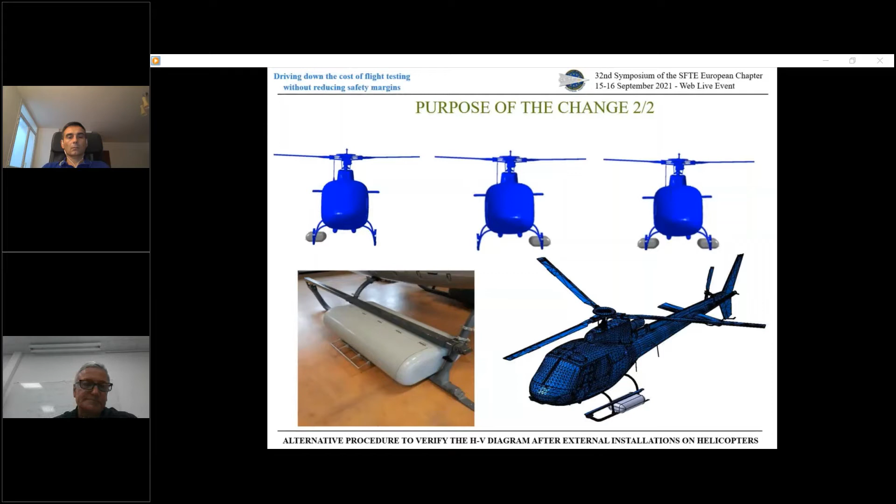Back in 2019, to support the industry, EASA issued a certification memorandum on external installation on helicopters, which provides specific guidance for certification of external installations that are considered non-extensive and for which paragraph 865 of the CS is not applicable. Paragraph 865 is specific for external loads, such as those carried in hoist or sling operations, which are covered by a dedicated memorandum.

The memorandum on external installation on helicopters indicates flight testing as the ultimate means of showing compliance with the affected requirements, and endorses practical approaches which have proven to be effective and consistent with the consolidated guidance material. As we all know, this material is not binding, but it is generally considered a relevant support for the applicant, as it contains a great extent of practical indications derived from valuable lessons learned.

For example, a sound approach encouraged by the memorandum to show compliance with the performance requirements is to perform tests on both the unmodified or baseline and modified configuration. This method is known as a back-to-back approach.

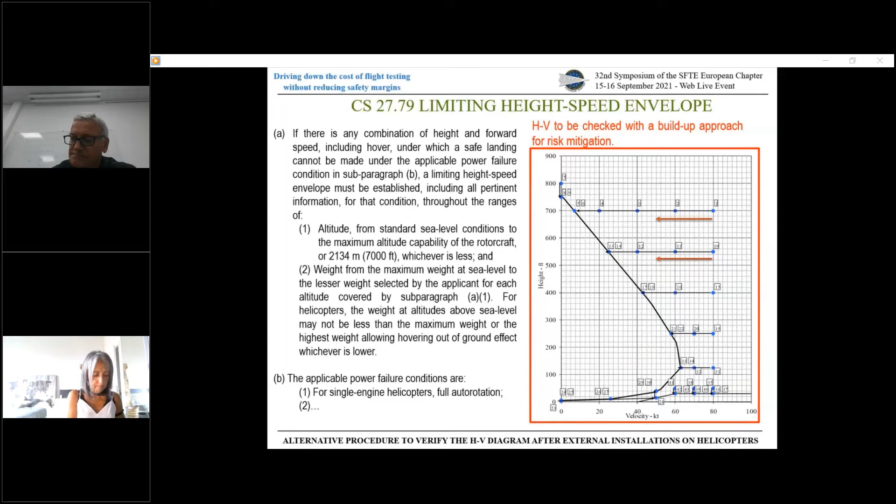Flight test investigation of the HV curve, if executed as indicated by the reference guide materials, involves a certain number of auto-rotation landings from low speed, low altitude initial points that, even in the most conservative build-up approach, involve a substantial risk.

However, from the initial investigation of the certification program, paragraph 79 was identified as potentially affected by the change, and TPS came up with this alternative procedure in the effort of reducing risks and costs associated to the test.

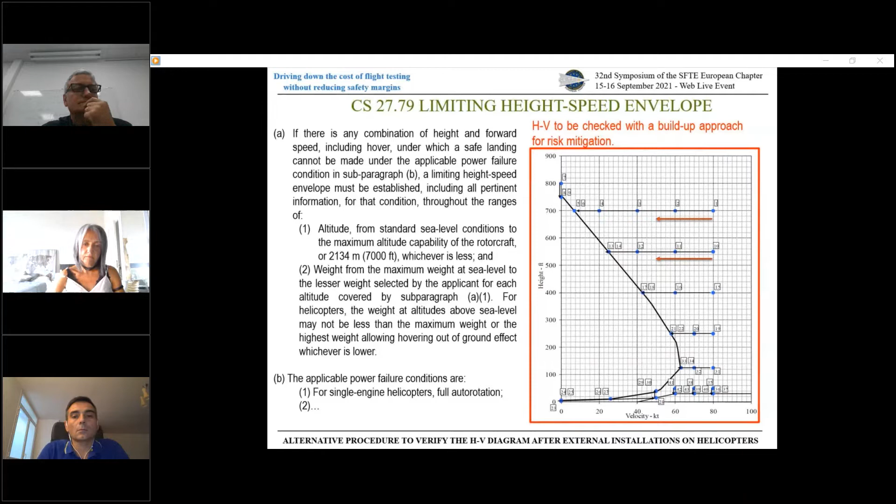EASA saw that the method had potential and accepted to evaluate it. So we started a two-phase testing campaign, and the evaluation of this alternative procedure presented today is the result of the joint effort and professional skills of the whole team.

In detail, HV curve verification implies testing whether, in case of a sudden power loss and within certain limits of altitude and speed, the rotor maintains enough power to enter autorotation in a forward descending trajectory, which precedes the flare and landing. That must be performed maintaining vertical and forward speeds within acceptable limits.

In more detail, in case of a power loss, the rotor torque is suddenly reduced, causing a drop in rotor speed, and the maneuver to enter autorotation consists in a quick reduction of the collective pitch. By reducing the blade pitch, the rotor drag can be reduced, and the resultant of the aerodynamic forces can rotate to propel the blade and increase the rotor speed.

The use of the cyclic control counteracts the helicopter tendency to pitch up and down, depending on the position of the center of gravity.

We can see that in steady autorotation, a given value of the collective pitch will cause the helicopter to settle on a unique descent speed.

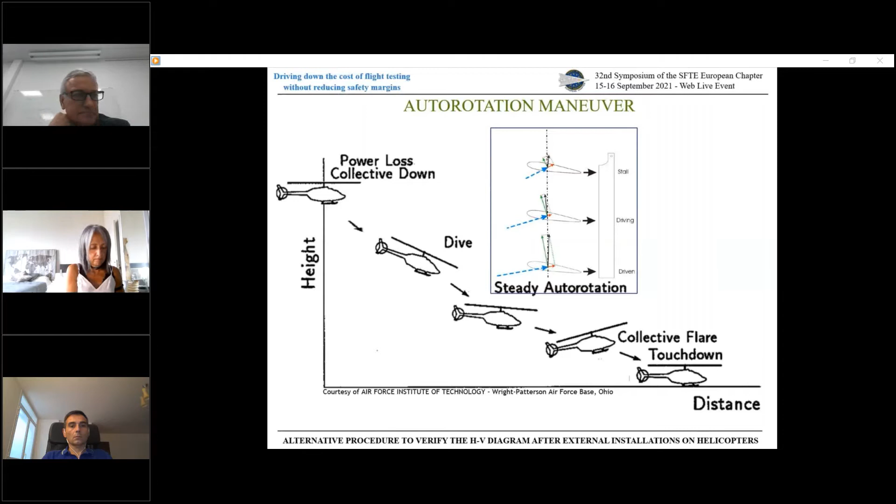The pilot can control the rotor speed using the collective pitch, meaning that the lower the pitch, the higher the rotor speed. But in practice, the usable range of rotor speed is very restricted.

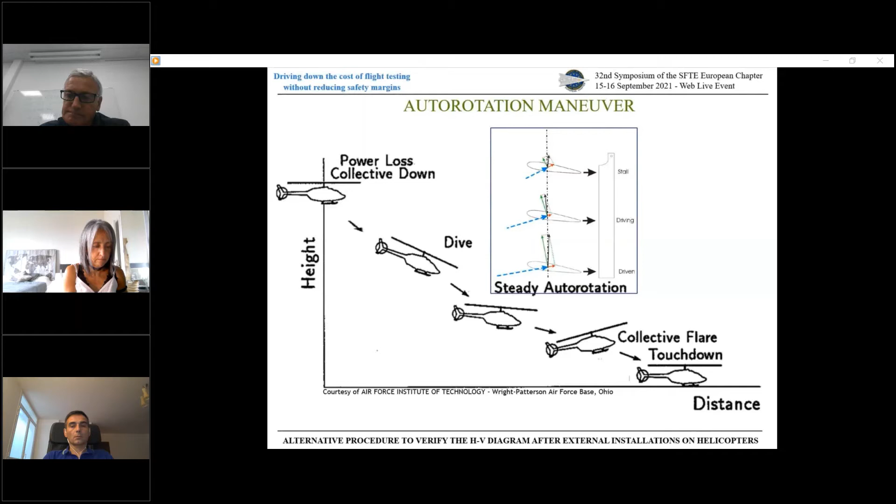If the rotor speed is too low, for example, the blade will stall and lose lift. If it increases over the prescribed upper limit, the loads on the rotor hub and blade roots could exceed the structural limits. So the safe range is typically within 80% to 120% of the nominal rotor speed for transient excursions, and between 90 to 110% for the stabilized condition.

So it was decided to start with the preliminary analysis that had to be supported by the test results obtained in the first part of the test campaign, which did not involve any HV curve testing. The preliminary analysis consisted in analyzing the dynamics of the autorotation maneuver and identifying whether the embodiment of the change could have had an impact on any of the basic phases in which the maneuver can be split.

Before entering into the details, we can start analyzing the avoidance zone, which is defined by 4 points. There is point D on top, at zero airspeed, and at that minimum height for which the potential energy can still be converted into kinetic energy to accomplish steady descent in autorotation and a safe landing.

From this point of view, it is not easy to understand whether the modification could have an impact or not, but we will see that this is one of the key points that must be analyzed.

Point C is also known as the knee point, and is the most critical point in the HV curve, as it involves a very low ground height combined with a rotorcraft speed for which the additional drag generated by the basket could have surely been detected.

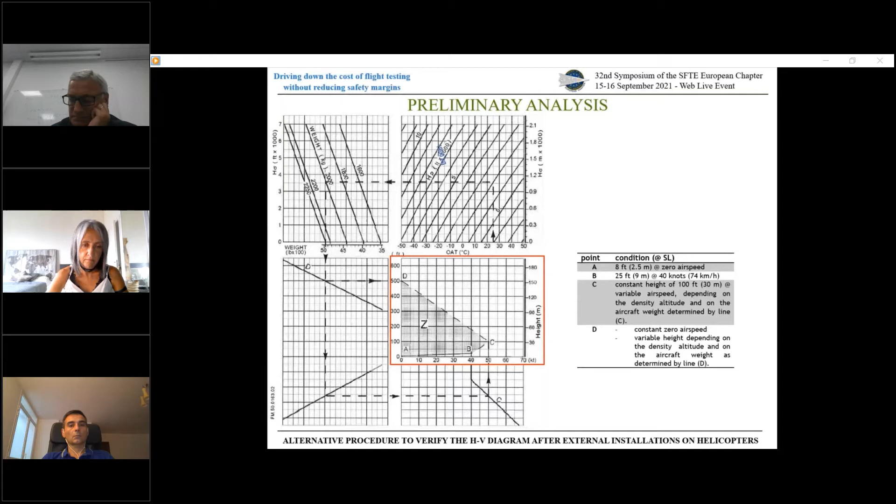As we mentioned already, the key point of the proposed alternative procedure for showing compliance with requirement 79 is to investigate the autorotation dynamics to assess whether the embodiment of the external installation can have an impact on any of the phases that here we have sketched.

The hovering, which is an extreme condition for which an engine failure can occur. Then there is the autorotation entry, which is the phase immediately after the engine failure and the pilot reaction. Then there is the glide, which is not a steady regime analyzed in performance assessment, but it is the transient which goes from the engine failure to the steady regime.

The helicopter is descending at the minimum rate of descent, considering that the engine failure can occur from any initial condition in terms of forward speed, from 0 to 50 knots, and this is for the AS350. Next phase is flare, and then we have the touchdown.

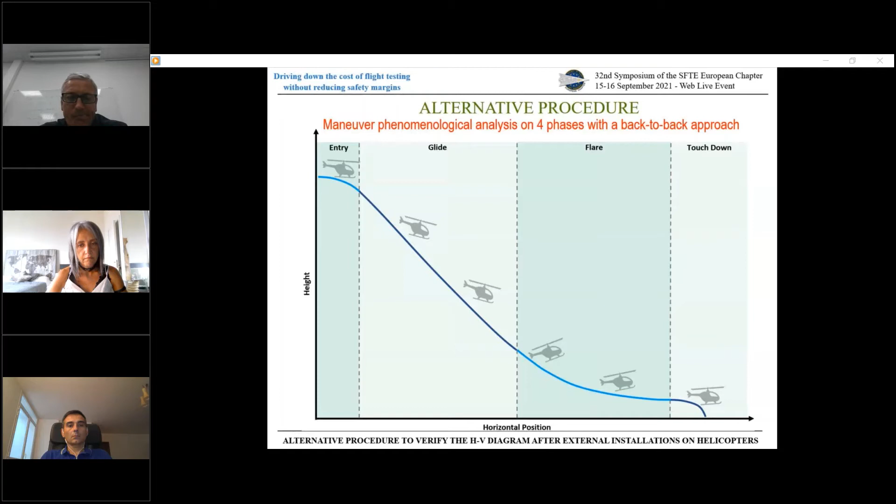So the first phase, we say, is the hovering, and it was estimated that the embodiment of the basket implied an increase in drag with helicopter speed above a minimum value. In point D, or in hovering, however, this effect is not detectable because there is zero speed.

Chances were, however, to find a difference in the power required to maintain the hover condition, as the presence of the basket could have had an effect on the induced velocity distribution and then on the dynamics which precede the entrance into autorotation. This effect was expected to be proportional to the percentage of the rotor area affected by the basket blockage, which was roughly estimated around 1.5%, which is surely a very small amount.

The hover condition, however, was indicated as a critical condition and had to be investigated. The key parameter that must be analyzed in this phase is the out-of-ground effect hovering performance in terms of the power necessary to hover, which is measured through the torque level in relation to the helicopter weight that must be converted into a generalized weight to facilitate the back-to-back approach.

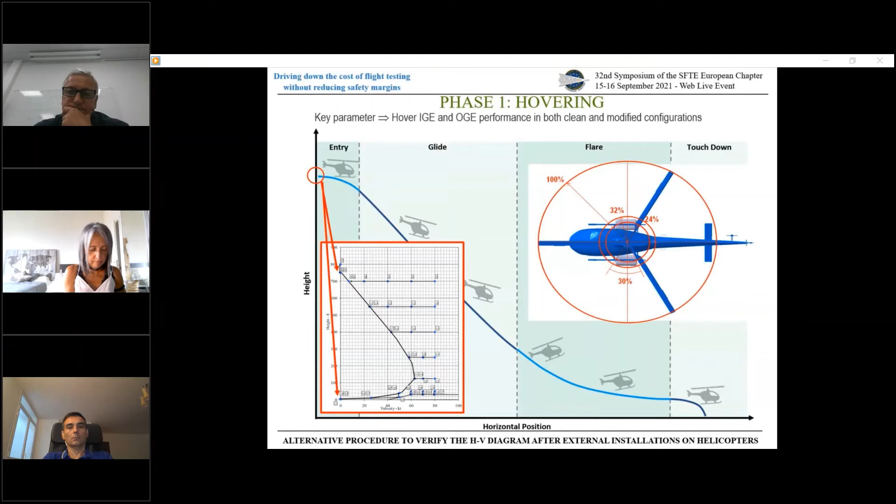The analysis is completed then by the estimation of the in-ground effect hovering performance, which can also give good indication of the impact of the change in the proximity of the lower hovering point.

The second phase is the autorotation entry, and we all know that without sufficient power to maintain the hover, for example, the helicopter will descend, and the descending aircraft can use the relative upward flowing air to drive the main rotor, and this is the essence of autorotation.

More details: in case of power loss, the rotor torque will be reduced, causing rotor speed decay. The initial rotor speed decay rate can be estimated by the ratio of the unbalanced torque due to the engine stop and the rotor inertia.

The scientific literature reports that the factors affecting the rotor speed decay are, besides the rotor inertia, the rotor speed and the torque at the instant of the power loss, as well as the ratio of the thrust required over the maximum thrust that the helicopter can produce.

Important additional factors include also how quick the pilot is in attempting to contain the rotor speed within the limits, with the maximum acceptable delay time defined as the delay that causes the rotor speed to reach the minimum power-off transient value before rising to achieve a stable autorotation condition.

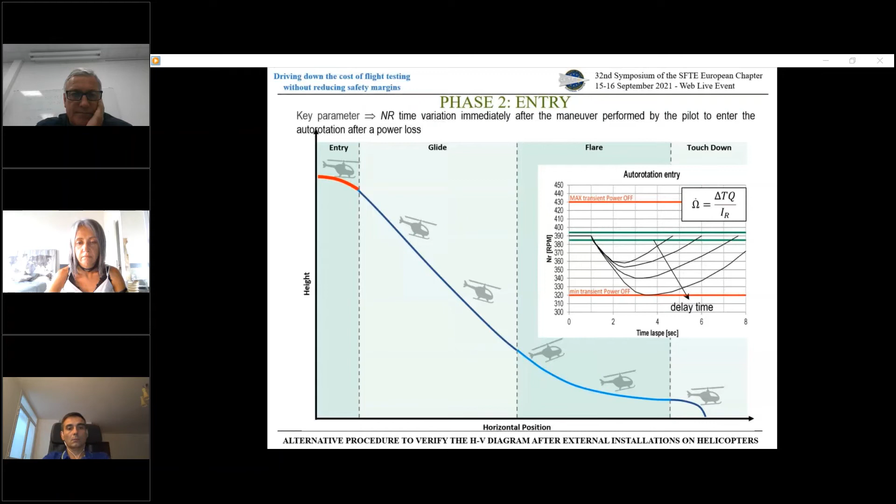The third phase is the glide, and after a power loss in hovering, which is considered the extreme starting point, the key characteristic here is the ability of the helicopter to accelerate to a rotorcraft speed corresponding to the minimum rate of descent, which is approximately equal to the speed of maximum rate of climb, Vy.

To evaluate the acceleration characteristics in this phase, measurements must be focused on the loss of altitude, delta H, and the time required to accelerate in this unsteady glide the rotorcraft from 0 to the flare speed Vy.

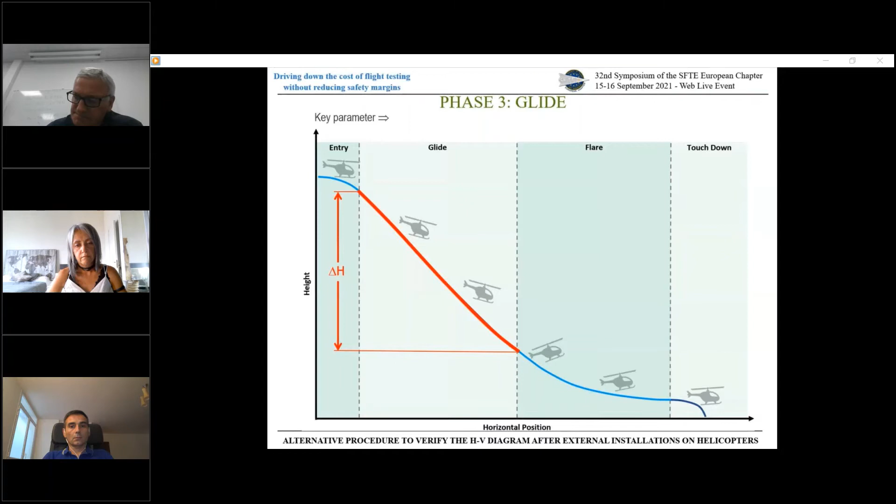The fourth phase is flare, which is assessed in a qualitative way in terms of the effectiveness of the control to flare the helicopter, decelerating drastically to a forward speed compatible with a safe touchdown.

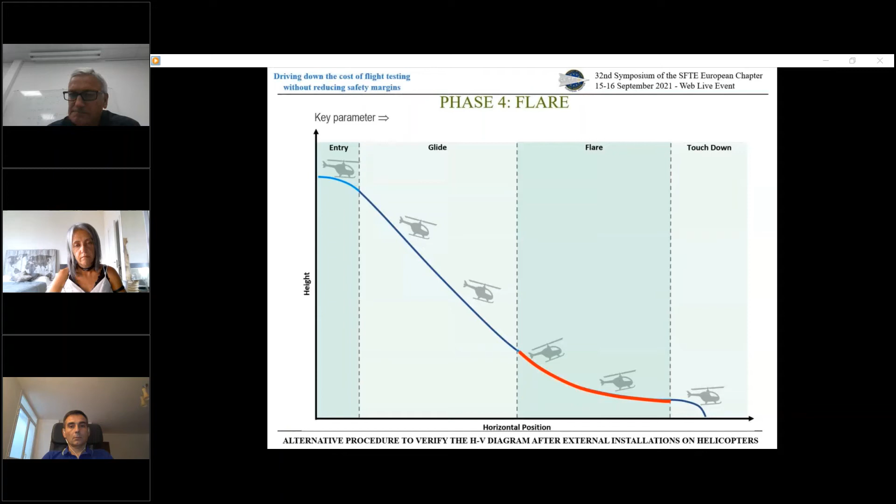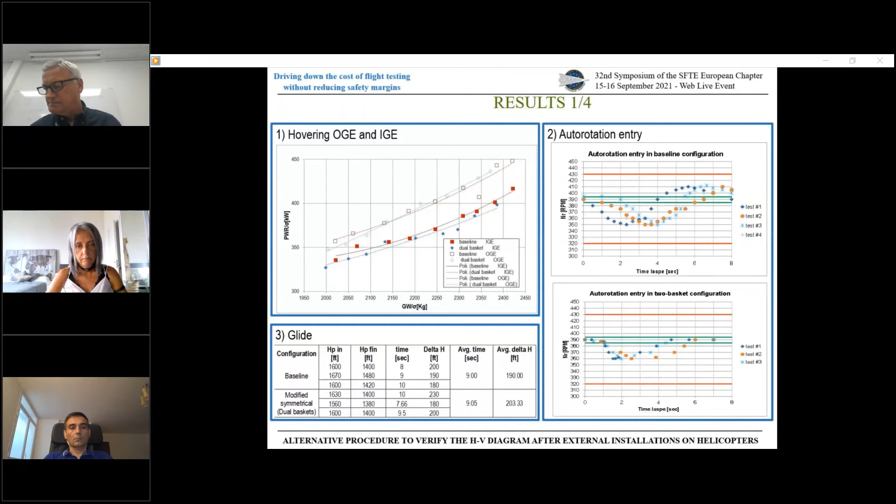A great extent of the first part of the flight test campaign was dedicated to gathering data that could give qualitative evidence in support of the proposed procedure. Specific tests were planned and performed to investigate the four phases already mentioned: hovering in-ground effect and out-of-ground effect, auto-rotation entry, glide, and flare.

The objective of the hovering performance test was to determine the power required to hover out-of-ground effect at different gross weights, with particular relevance for the maximum takeoff weight.

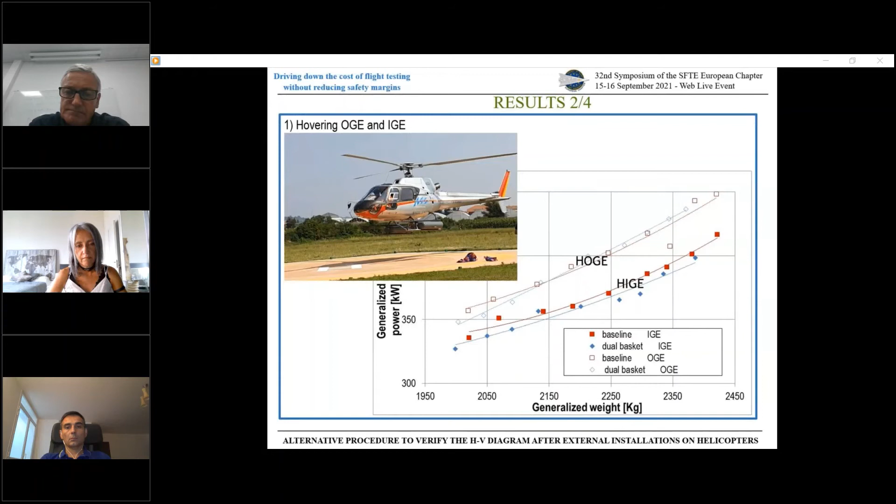Hover performance tests were executed with the free flight hover technique, with the helicopter gross mass in a range from the maximum takeoff mass of 2,250 kilograms to 1,822 kilograms. Quick variation in weight was made possible by removing bags of ballast for each test point, and in the end by removing crew members.

The test for auto-rotation entry consisted in a set of maneuvers to enter auto-rotation, starting from the hover condition. To perform this test, the lead flight test engineer initiated a simulated engine failure by retarding rapidly the fuel control lever to a ground idle position.

We used a 1 second delay from the initiated power loss to the control actuation. Following this 1 second delay, the collective was lowered and rotor speed decay was monitored and video recorded. Upon reaching a forward speed in the range of 50 to 55 knots, the auto-rotation was recovered by adding engine power through the fuel control lever.

This procedure was repeated multiple times for each configuration so as to obtain statistically meaningful results. In all the configurations, as we can see, the minimum rotor speed is never reached, and auto-rotation is stabilized within 8 to 9 seconds from the engine stop.

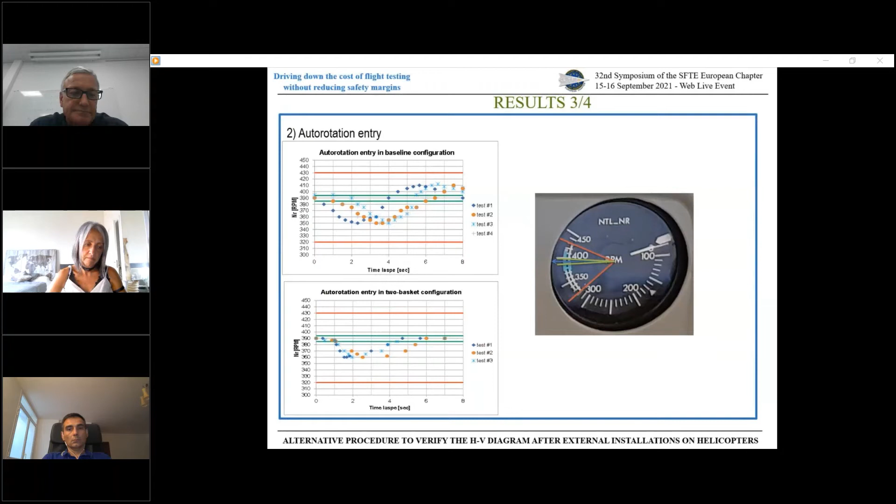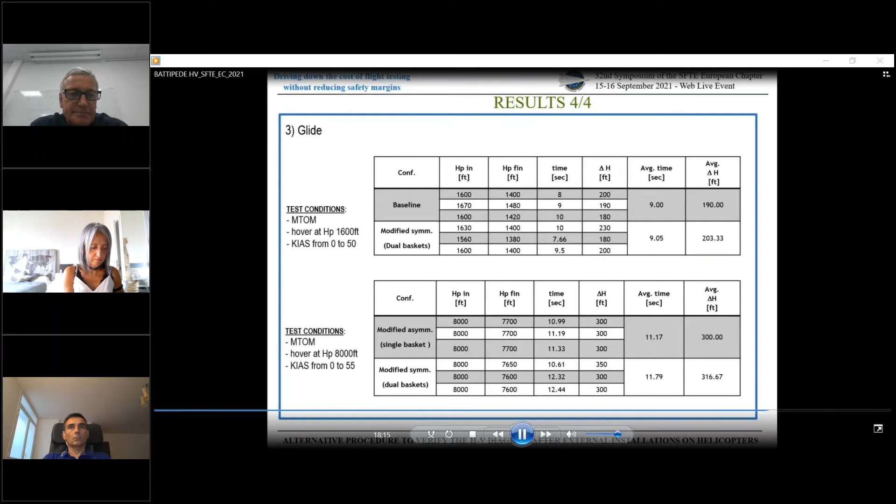As we mentioned already, the glide immediately after the engine failure is that transient regime which is necessary to reach the speed of minimum rate of descent, which is approximately Vy. Tests were conducted at multiple altitudes and initial conditions, and results reveal that the behavior of the helicopter in both the modified configurations is acceptable.

There is, of course, a slight difference in the altitude drop, and in fact we can see that the modified configuration reaches the target speed after higher altitude drops, and this can be related to the extra drag introduced by the baskets. The dual basket configuration in this respect performs a bit worse than the single basket configuration.

Differences in the transient dynamics, however, are in the order of 5% in terms of altitude loss, which goes unnoticed in the economy of the overall maneuver.

The last part of the results concerned flare characteristics, which were investigated in a qualitative way. Tests were conducted at low altitude, performing quick stop maneuvers at different speeds and flare angles for the three configurations. Pilots commented that there were no noticeable differences in the effort required to flare the helicopter.

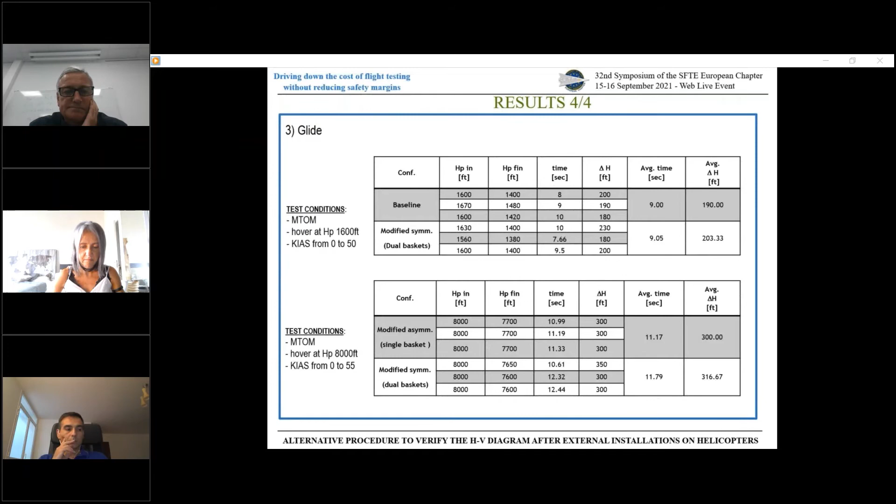To conclude, the proposed procedure allows considerable reduction of test points, which implies a reduction of costs in flight testing without any reduction in safety margin. On the contrary, safety is enhanced, since it is shown that only the necessary, affected and relevant part of the HV curve will require actual verification.

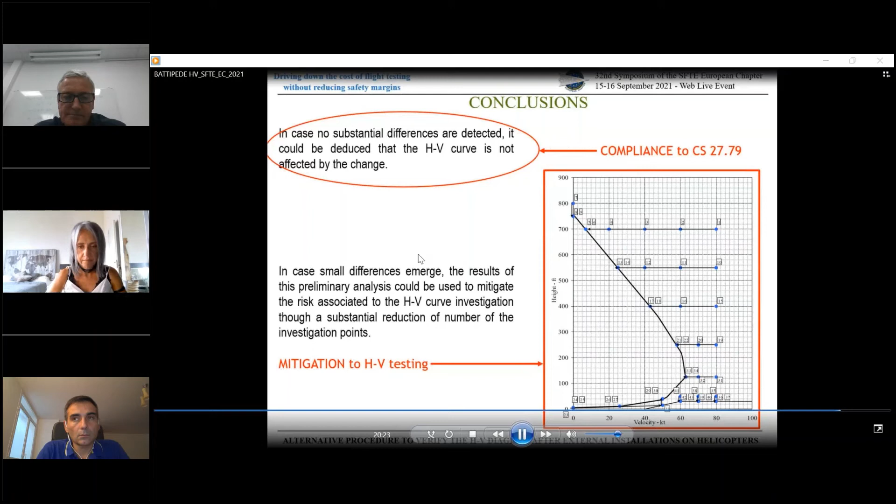There are a few major benefits to this procedure. First, no complete engine-out landings were conducted, especially in the proximity of the HV curve. Second, all testing involving engine failure simulation can be performed at safe height above terrain, since there is no more requirement to demonstrate full auto-rotation landing starting from specific height and speed points as for the full HV curve demonstration.

To give a quantitative estimation, it has been estimated that less than 30 points were needed, as opposed to the foreseen 80 or more test points necessary for a complete investigation of the HV curve, which is usually performed at the maximum takeoff mass involving at least 2 density altitudes, meaning finding a low and high altitude field and using a proper build-up approach in speed and height.